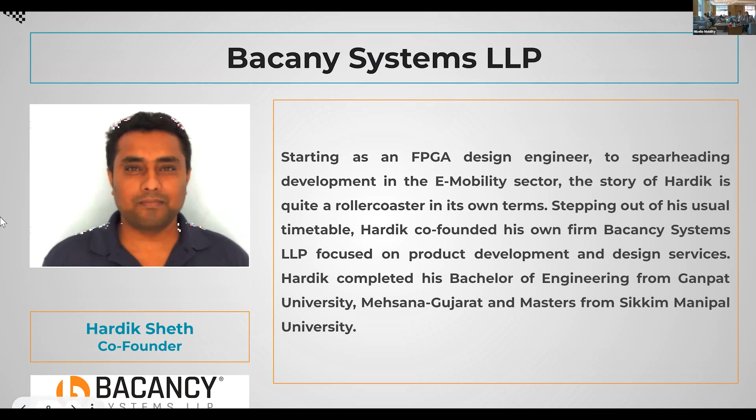So firstly, what we are doing at Igren Energi - I've been at Igren Energi for the last 6.5 to 7 years. When we started here, we had an IP and we started with a solar product. We took a pivot and went into BMS because our IP was mostly directed and was going to be used in BMS kind of application. I have been involved here, working with the product development team, so I know the product inside out. And right now I have migrated and started working into all the customer engagements happening here.

Like I said, I'm an electrical pass-out, and I've previously worked with big power system applications, big power plants and everything. But in the power electronics field, I believe there is a lot of scope, and with BMS and customers knowing what a BMS is, that's the best thing that has happened in recent times. People right now, like what Sahil and Chaitanya have said, are coming to us and asking relevant, directed questions, and right now the customers know exactly what they want - that's a very important thing we are seeing right now. So we'll take this discussion forward with all the questions that we'll have.

Okay, maybe we can allow the screen sharing. I'll mute myself. Okay. No, it's mute, it's mute. Go ahead.

Hello all, I'm Kamlesh, and I work as a business development manager for CFD and thermal solutions for Altair, covering India and Gulf. Thanks for the opportunity, and a very good afternoon to all of you. I'll be covering a bit on electrification and different solution offerings from Altair, and most probably the entire solution for BMS.

I normally start with the agenda to give a heads up of what I'm going to talk about. The first topic is almost covered over the last hour, so I'll skip most of it. Then the operation and advantages of BMS, then some causes of battery fire - some of the incidents in the news - and how Altair plays an important role in BMS and thermal management, and of course recommendations for BMS. So it will be mostly repetitive of what the panelists have spoken, but the solution we offer would be slightly different.

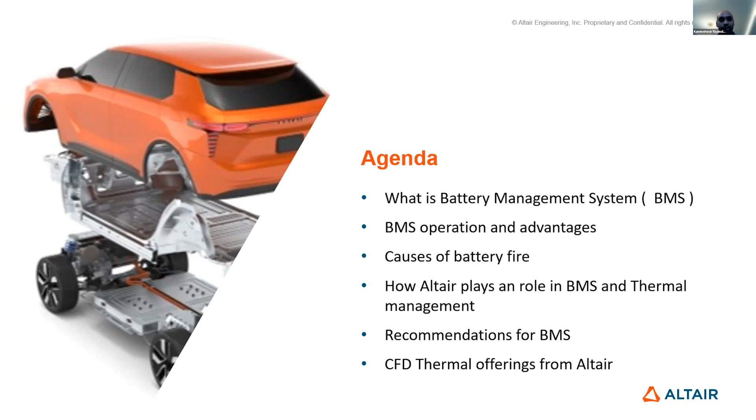Okay, so I'll carry on with what is BMS - I think everyone in the meeting is aware of it. I would just like to say it's a system control unit modeled to confirm the operational safety of the battery pack system and maximize performance. But there's more to it - complete monitoring, complete protection, complete charging, discharging, communication between different electronic controls, complete diagnosis of the battery including SOC, SOH, etc., and complete data management, which is necessary for performance efficiency of the vehicle.

Everything comes from BMS. There was a discussion earlier about how we should be able to monitor, and most importantly, how we would be able to validate it as well. So that's the solution Altair gives.

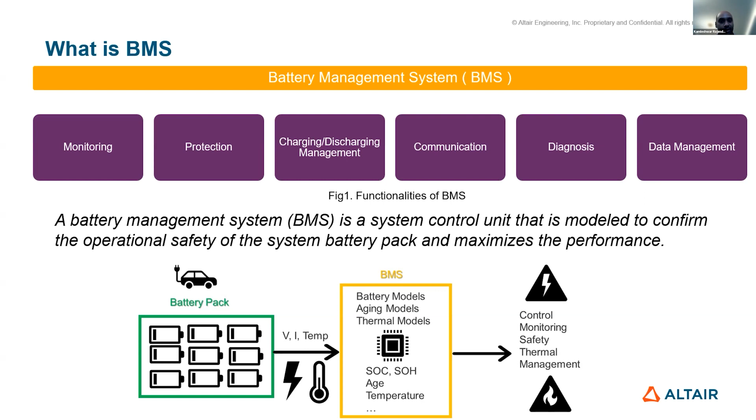So normally the operation inside a vehicle comes from the BMS, from the accelerator, from the electronic control unit. Then it diagnoses the battery performance, goes to the power converter from the motor, and then it senses the complete communication on board.

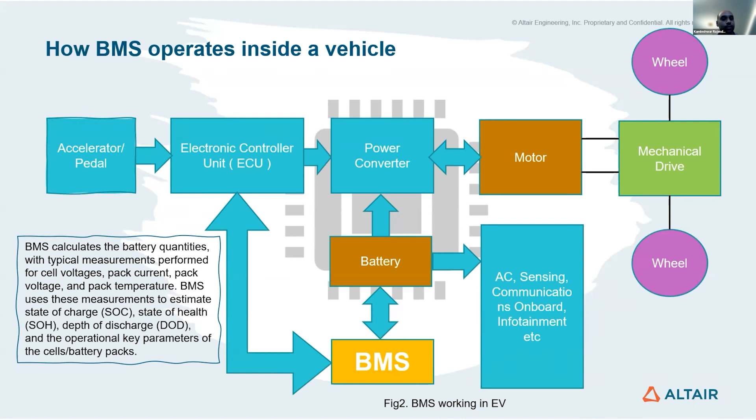From Altair's point of view, the solution offerings are divided into technical, operational, and economical aspects, because everything ends in a business. The technical point covers preventing damage from over/under voltage, cell balancing, and limiting charge current. Operationally, the most important thing is minimizing thermal runaway and ensuring safety and reliability. Economically, it's of course about low cost.

So people, electric vehicle manufacturers, safety and the economical aspects required to ensure safety often go hand in hand. So these three important steps are required to entirely maintain the battery management system.

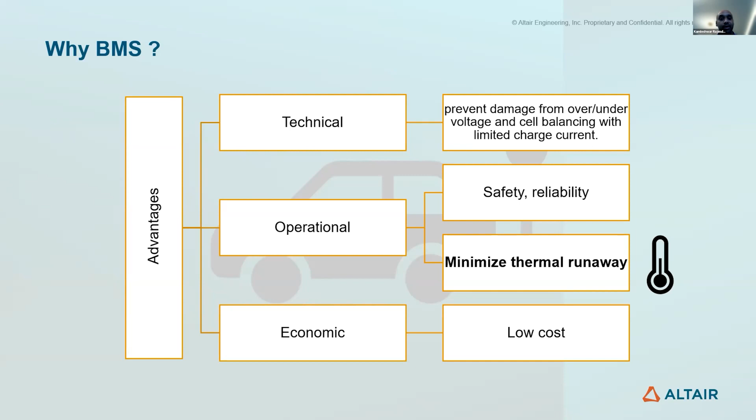I will mostly speak about the causes already discussed in the panel discussion, but I'll run through some important points. Faulty electrical and mechanical design—this is a debatable statement, but design validation and tuning is particularly necessary for the BMS, meaning how much load it can manage, how it will monitor, how it will diagnose, etc.

Then of course there's production quality. I do understand that manufacturing these systems is very niche, and it requires a lot of technology and precision to manufacture these kinds of things.

And of course battery monitoring—I'm going to speak a lot about it in the coming slides. Complete discharging and overcharging, what's the defect, we would be able to cover that.

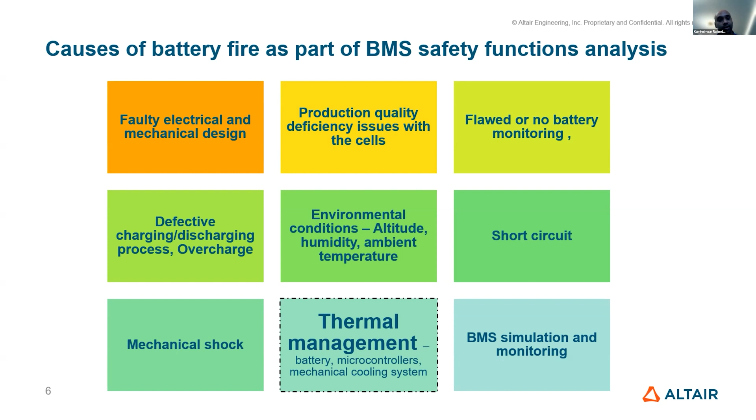Environmental conditions with higher temperature, high summer picking up—people don't realize, technologically, people don't realize as well. Most of them think it's due to high summer that the battery is not able to perform, but it's not just that. Environmental conditions, short circuit, mechanical shocks, and most importantly thermal management play an important role.

So that was just a quick cover. Now, how Altair plays a role in the battery management system, basically to optimize the performance and enhance safety.

Electrification solutions—Altair is basically a software and engineering solutions and consulting company. We have a lot of solution offerings in different fields, starting from structural, electromagnetic, CFD, thermal, and we also have a consulting division.

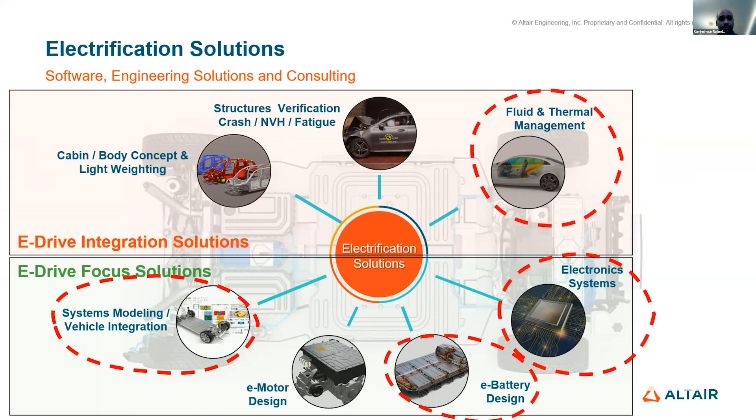We started as a pre-processing company with Hypermesh as our flagship product, particularly for structural, crash, and NVH fatigue. Then we eventually ventured into fluid and thermal management, system modeling, e-motor design, e-battery design, and electronic systems. I'll mostly cover system modeling, fluid and thermal management, a single slide on electronic systems, and battery design.

For e-motor design, we have a solution offering from an electromagnetic software called Flux, which is a low frequency electromagnetic tool used to design the e-motor. It can also do vibroacoustic analysis, and we offer a complete multi-physics platform for it.

Battery design is a huge responsibility. I understand, and being part of Altair, I'll take the liberty to say that nobody is perfect yet. Everyone is on the learning mode, the research mode, the testing mode. We are just contributing a bit of what we can do on battery design.

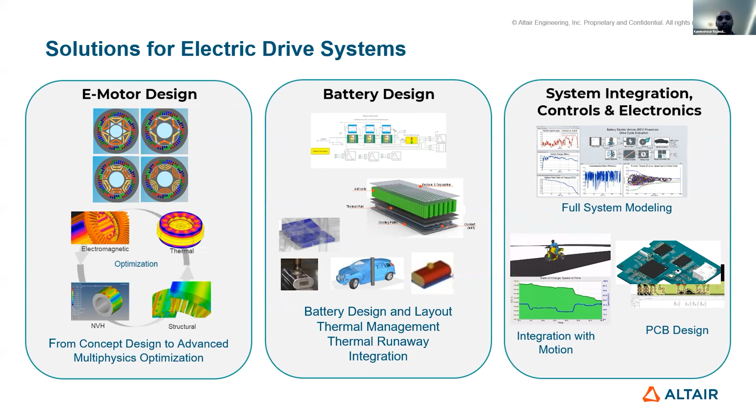System controls, integration and electronics are major contributors to BMS, for predicting state of health and state of charge. Complete full system modeling is available for this.

There were a lot of challenges discussed between design and how the system functions. We exactly fall in between—once you design it, we also help in designing, but how do you validate it? There was a question about how to validate it even before it gets into prototyping.

Say you have a design and you want to fine tune your product—this is the solution Altair gives with respect to battery design and the BMS system. If you see this entirely, we can do a system level simulation or a single product level simulation as well.

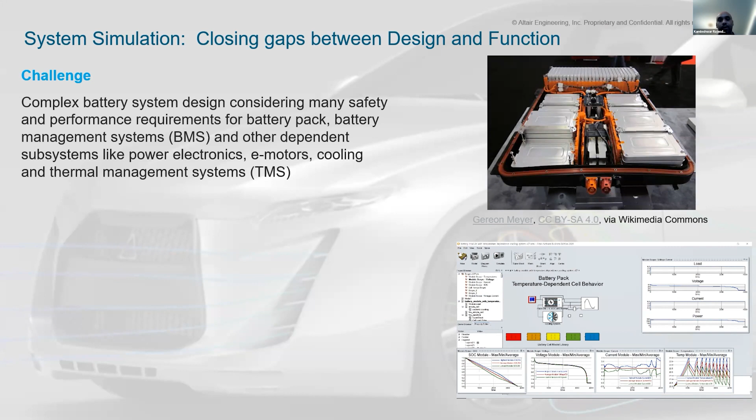The complete cooling cycle, complete state of discharge, voltage coming in, state of charge, current module, and maximum temperature attained—everything can be covered using a particular software. I'm going to talk about it and show some pictures; it's public as well. The solution we offer for that is Activate, for battery pack system behavior, which includes multi-physics.

It has hybrid system signals, complete physical libraries, Modelica, HyperSpice. Then we have Compose, where you can put in some scripts for cell model parameters, and you can go on with the complete behavior of the cell.

Then the hardware, so functional mockup units. If you want to write a code for your BMS as well, and how it's going to function, how to fine tune it, how to validate it, we offer that solution as well.

Then most importantly, we help you in the design decisions even before it gets into prototyping, and optimize the performance and verify the critical safety requirements, which is particularly required for BMS.

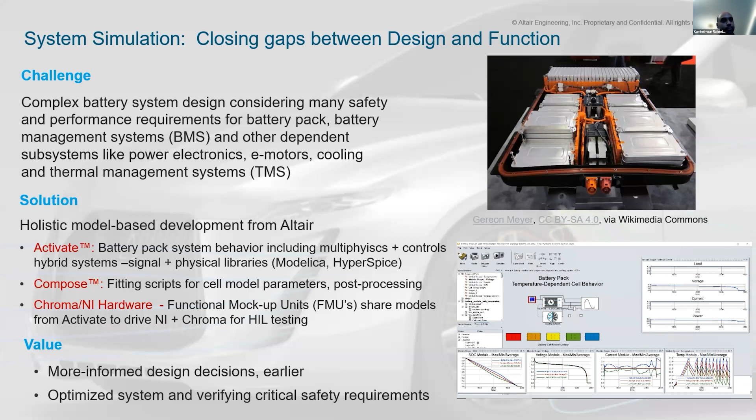Now this is a public example which we are working with an EV startup, and this is available on the Altair website, so I just took out a picture. There is a charger and load, you can see a lot of cylindrical cells attached to the BMS, there's a lot of connectors, and what we have is an Altair Embed GUI.

This is the solution we offer. We verify and fine tune the complete BMS solution for different sets of series or parallel battery loads which are required.

What is the state of charge? What is the voltage it can manage? What is over-fluctuating? Whether the cell performance is going for a toss, complete voltage, complete charger, everything we would be able to analyze and set, and it will also help you design the BMS according to your battery specification, and vice versa as well.

So you might have designed a complete battery with respect to the series loading or the parallel loading, with the serial link between your BMS. So we offer software which can particularly link with your testing parameters and help you recalibrate or revalidate your BMS with respect to your battery pack.

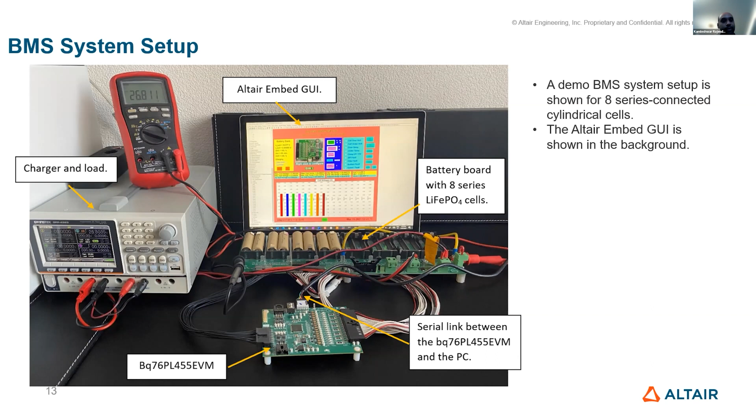Okay, so that's Embed, and most importantly, what is the custom solution you want to get developed? It can be an integrated development in order to perform a complete set of tasks to achieve a final design.

It can be anything - cell temperature as a variable, how the cell is behaving, what is the state of health, what is the state of charge, what is the number of cells, whether some cells are shooting up, some reactions are happening, what is the voltage, what is the voltage fluctuation - different sets of measurements.

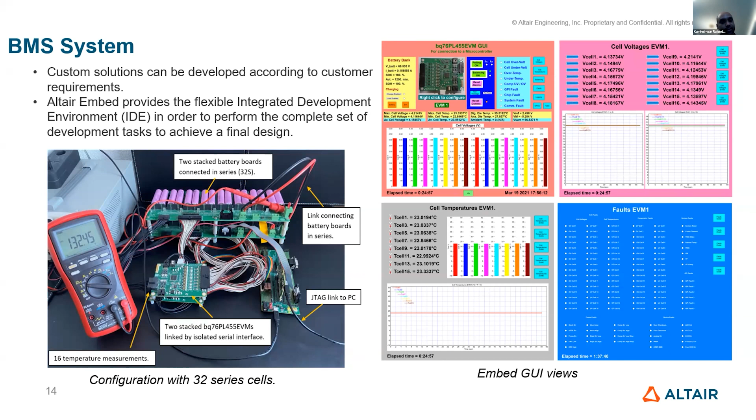If there are any hotspots coming in, we would be able to analyze that and identify the fault if it's there, and integrate this BMS with our software solutions what we offer.

Of course, the most important stuff - charging and discharging. So take any battery pack with a particular BMS which is designed to calibrate it. The complete controller which is developed in Embed with respect to the software coding, and it's vice versa as well, and you can integrate with the different battery pack design as well. You would be able to completely control it, and we help in validating the controller and as well as the complete charger and loader.

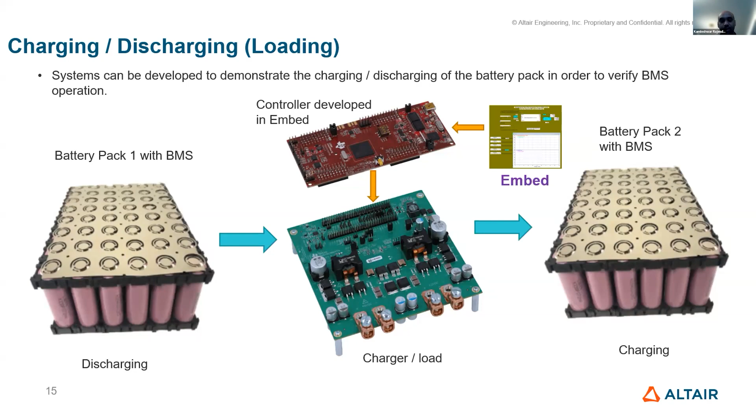So battery thermal management, this is my favorite topic. I come from a CFD thermal background. Of course, addressing key challenges, BMS does play an important role.

So analyzing the performance, what is the temperature, any hotspot, how does the performance compare to different iterations, how long it is going to take, then what is the performance of a product, whether it meets your specified targets, it meets your efficiency - so how does CFD help you in that.

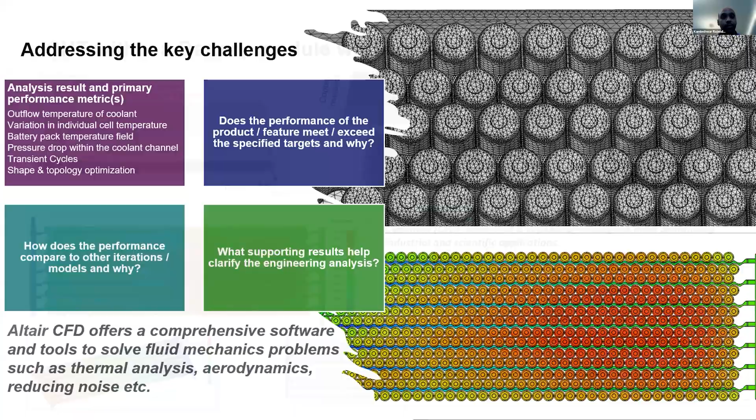So we do have a complete battery module within our software solutions, and it is a general purpose code, but of course we have developed certain niche charging and discharging cycles for the battery - this is a public model which is around 560 lithium ion cells.

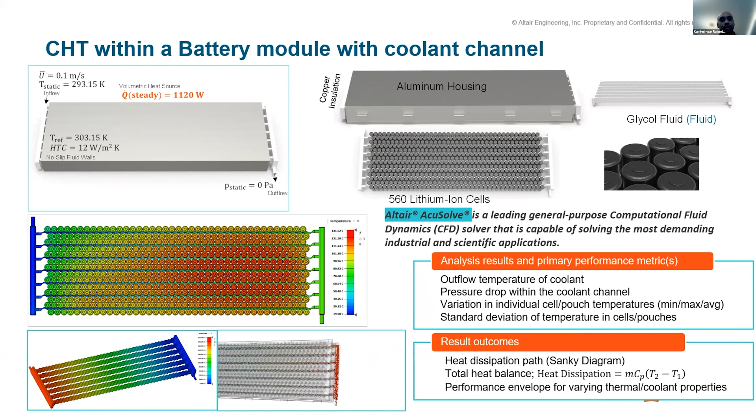Different outflow temperature, pressure drop variations - you can verify where the hotspot is, complete heat dissipation, total heat balance performing, and for complete active cooling, predict how much, how the temperature of the battery pack is, whether the coolant is taking away the heat, ensuring that your battery pack is at a proper temperature.

Then complete charging and discharging cycle of a battery with respect to your initial state of charge, then with the current being supplied to it, what are the thermal loads, what are the ambient conditions. Humidity also plays an important role - if it's say in Chennai it's humid, Mumbai it's humid, so you would be able to put in humidity as a factor as well.

Not much, but of course humidity is a factor, and you would be able to do ambient temperature modeling. You can also input solar radiation as a factor and analyze the exact battery performance, with respect to a battery pack or a particular BMS.

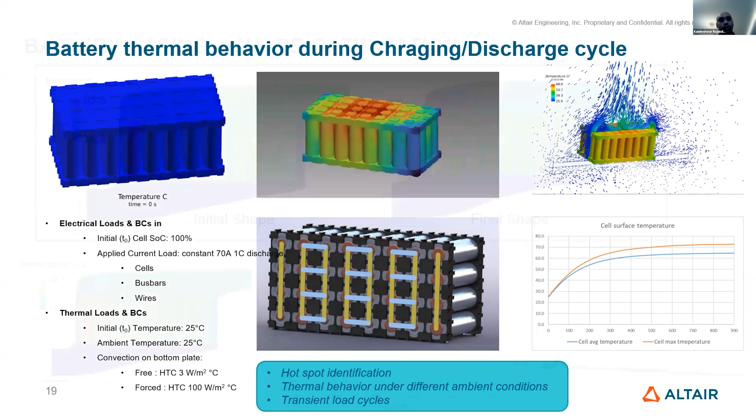I'm also going to show you an example of certain battery casing optimization, and I'll also show an example of a complete vehicle EV development with a public example from two of the prominent EV startups in Bangalore.

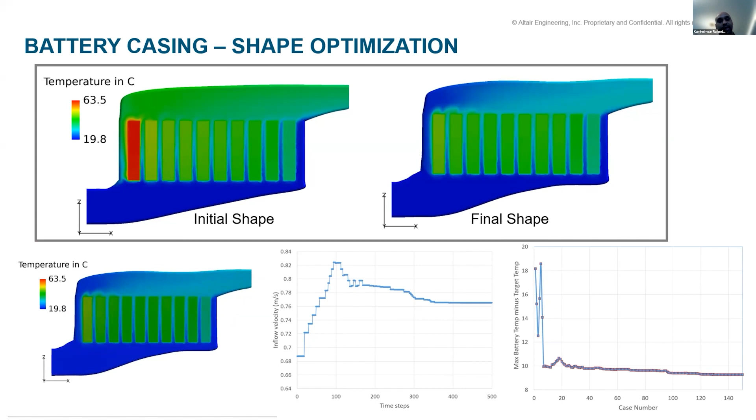For battery casing optimization, if you want to optimize your battery pack design with temperature as a variable, you can design accordingly to ensure the temperature of your cells is lower, the cooling is much faster, and there is no recirculation of air, ensuring the air is taking away the heat. So we would be able to help you in that.

We also offer electronic thermal management. We have an ElectroFlo solution particularly designed for electronic PCBs, system level thermal analysis as well, giving voltage as an input. So there are different solutions.

I don't want to confuse people with particular names, but these are just Altair solutions for different applications. We would be able to help you with a complete PCB thermal environment, identify the copper layers or vias, and change electronic design. So we can help you in complete electronic thermal management as well.

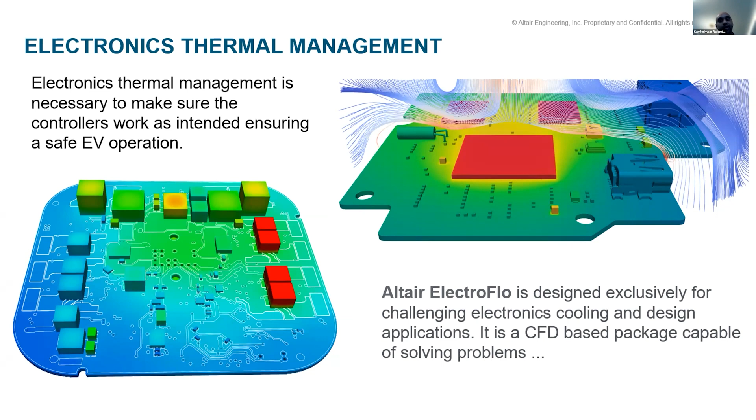Some of the recommendations for BMS, according to me and some of my colleagues, we have put together. Of course, you guys are the experts on it, but just to put my views on it.

So it can be anything - structural, different types of parameters, the positive temperature coefficient sensor, then the motor driving as well which passes on the supply, and how much load the BMS can manage, the complete integration with the safety vents, the shutdown separators.

If these go for a toss, say the temperature of the battery is increasing and it's not working out, it is going to increase the temperature at some point, and it's going to lead to an incident. So complete mechanical system design, thermal, cool design, microcontroller heating - it's not limited, these are just my points. I think it was mostly discussed in the panel.

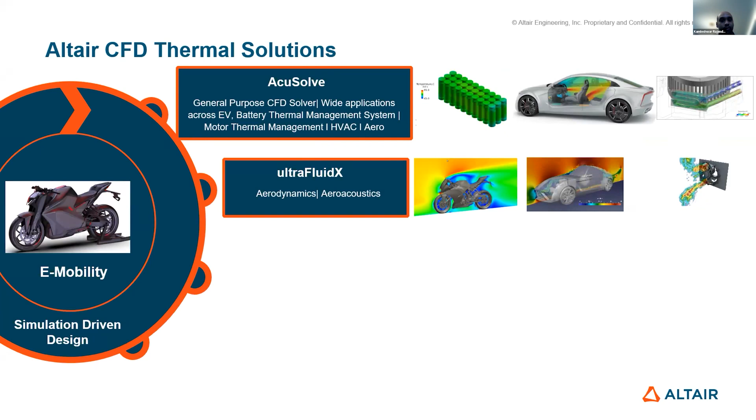I've also taken the liberty to show some of the Altair CFD thermal solutions for electrification. AcuSolve is a general purpose code particularly for battery thermal management, which I've already shown. Then ultraFluidX for complete aerodynamics and aeroacoustics, fan noise as well - it is a lattice Boltzmann code. nanoFluidX for EV gearbox oiling - it's a meshless CFD software.

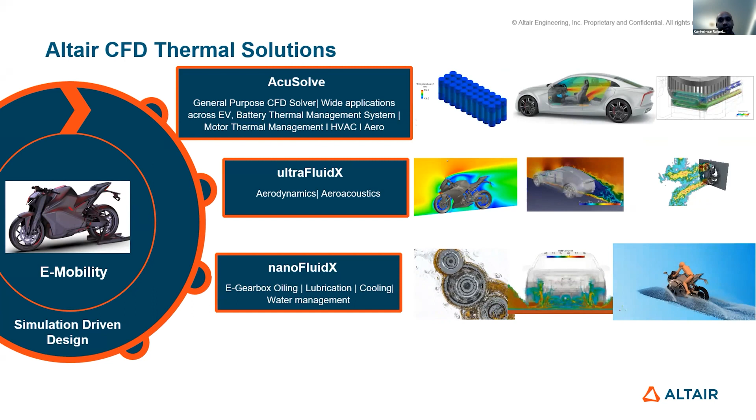Complete water wading, then ElectroFlo for electronic thermal management. These are some of the case studies which I was talking about.

One is Ultraviolette, and I'm thankful to them, Ultraviolette and Simple Energy. We had a virtual conference where they presented - this is a snap of it. The complete video recording from Ultraviolette and Simple Energy on how they utilized Altair CFD solutions is available on the Altair website. Ultraviolette completely uses Altair CFD for aerodynamics and battery pack cooling, and Simple Energy has gone through

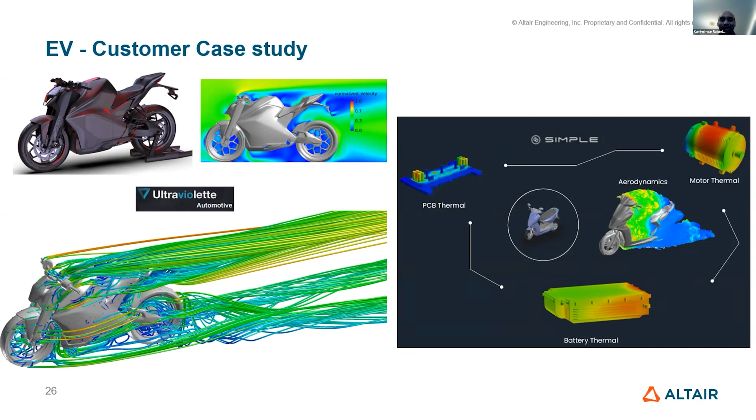the complete product development cycle of their electric two-wheeler, including PCB thermal, motor thermal, aerodynamics, and battery thermal. Actually, BMS as well has been customized completely using Altair CFD solutions.

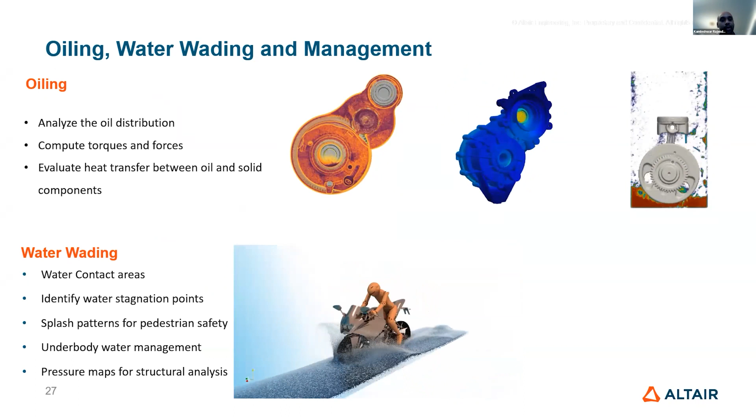Then these are some of the EV gearbox oiling and water wading cases for an electric motorbike as well, because this is one of the most important tests an electric two-wheeler or four-wheeler goes through. Some Nexon EV vehicles were recalled because of water clogging issues, so they are performing water wading simulations to identify the water clogging areas on the EV, whether the electronic components or battery are affected or not.

So this is my last slide. Altair completely provides solutions on battery thermal, BMS, motor multiphysics, aero, underhood, water wading, headlamp, humidity compensation, and electronic thermal management. Thank you, and any questions, I'm open to it.

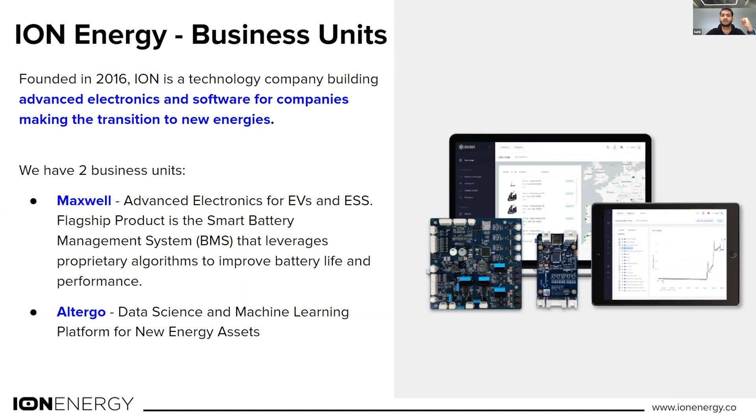So starting with, why BMS and software? So ION as a company, and Hiten knows this personally, we started off with trying to become a battery pack maker. We built India's first portable swappable battery pack. And then, we soon realized that the core differentiation between two battery companies will not come unless they differentiate on the BMS and software, because the cells come from the same suppliers.

And then the pack assembly is mostly operational and manufacturing heavy. So we identified where exactly the core differentiation would come from, and BMS being the brain of the battery, and software, of course, being on the cloud, and having the computational power of the cloud along with the resources you could optimize the battery pack using BMS and software. So that's how our focus shifted to BMS and software, and that's what we continue to do, along with some other advanced electronics that are currently underway, including the telematics control unit.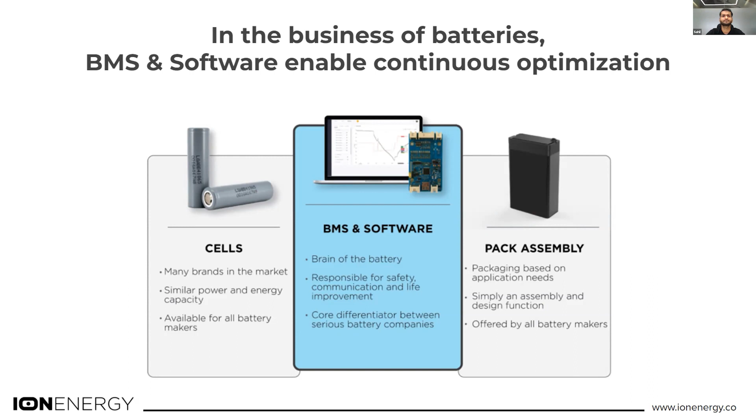What we are seeing is market moving towards something slightly more complex, wherein you have BMSs with data logging capabilities. You have a microcontroller, you have CAN-based communication that allows you to not only log the data from the battery, but also send that data either wired or wirelessly in order to visualize it on a platform in order to do diagnostics and troubleshooting. What we're also seeing is, some use cases in which we are using intelligent experience of the BMS, wherein the BMS is capable of two-way communication.

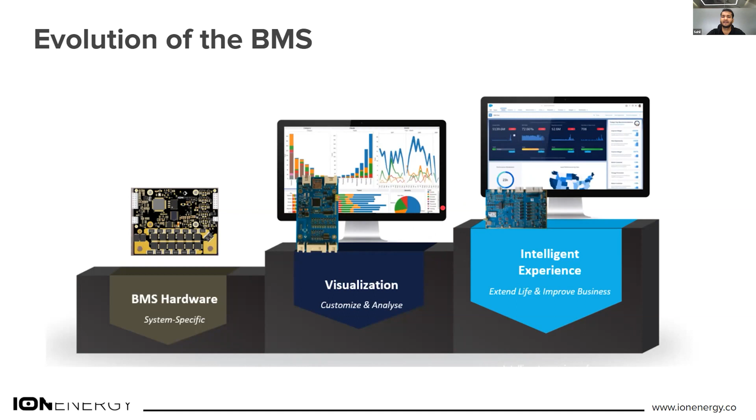So you have all the data extraction and sending of data to the cloud or to a wired platform, and then understanding that data in order to send over-the-air updates or firmware over-the-air updates in order to improve the life and performance of the battery. So ION essentially plays in this segment, visualization as well as the intelligent experience. I'll just touch upon what the intelligent experience is that we are offering, and then move on to why we believe that intelligent experience is not what the market may necessarily need at this point in time.

But before we jump to that, this is a quick overview of the product portfolio that we have. So you see 3 products over here. There are multiple variants within these products itself. Today, we have BMSs that cover the entire voltage spectrum, starting right from 24 volts, going all the way up to 1080 volts. So FSCT is the low voltage BMS, as you can see, for bicycle micromobility application.

FSLT is one of our highest selling products that's primarily used in 2 and 3 wheelers. What we have done is taken a platform approach and built the BMS to be extremely versatile, which means there is high configurability on these BMSs, and you can tweak a lot of these parameters to make them relevant for the application or use case you want.

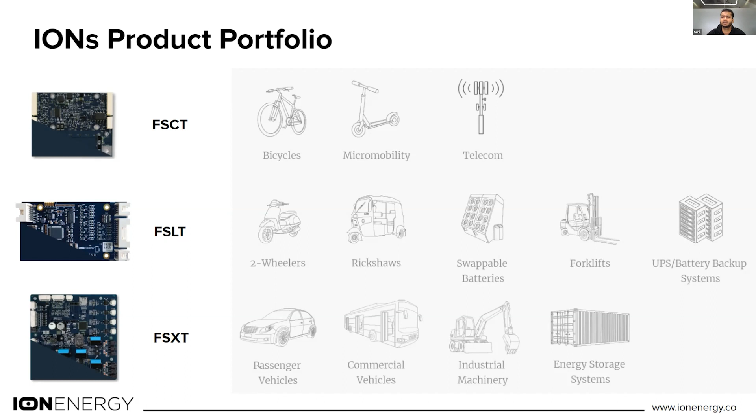Both these BMSs are... FSCT is a monolithic board which has MOSFETs on the board itself. FSLT basically works with power distribution units, or the MOSFET based SSR, up to 95 amperes. Then we have the FSXT, which is our high voltage BMS relevant for commercial vehicles and energy storage systems. You can get the data sheets on the website. I'm not going into too much technical information, this is just an overview of the applications these BMSs can cater to.

Talking about the intelligent BMS, the BMSs that we have designed today are intelligent. They have the capability to not only collect and send data, but also to receive data. So any config updates you would want to do, we leverage the smartphone or desktop software that we have to send config updates to the BMS. So the intelligent BMS is configurable, including the CAN IDs that you can tweak. We offer a lot of configuration parameters, almost about 250, 300 parameters that are there.

And I think Lithium Balance offers a similar experience as well. The idea is to make sure the user is able to tweak it based on the cells they use, the chemistry they're using, and the application they want to use it in. So on the right side, you see some of these config parameters, and within each of these branches, you see many more parameters that exist.

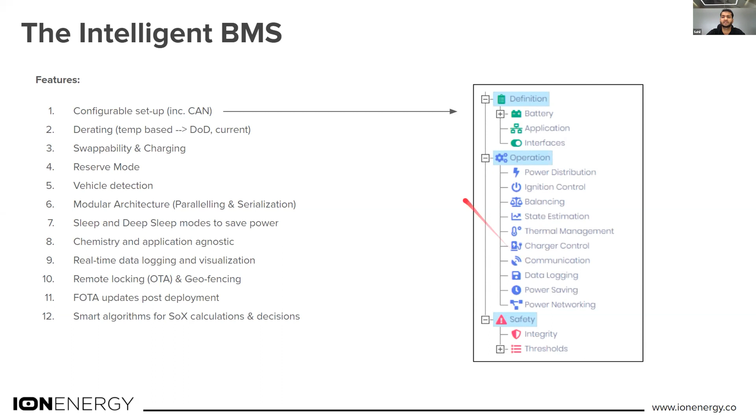From a swappability and charging standpoint, the expectation from an intelligent BMS is to basically manage portability and swappability. You have batteries that are currently getting connected in parallel. It's a very tricky use case, because if the SOCs are different and the batteries get connected to the network, there's a high paralleling current that can flow between them. So it's important that you make sure swappability is there, and when these batteries go inside the vehicles, the paralleling operates seamlessly.

From a swappability standpoint as well, a lot of customers are moving towards this. It's important that you don't just connect it with any charger. You basically have the right handshaking protocols and security protocols to make sure the batteries are not getting misused. So swappability and charging is a key feature that we offer.

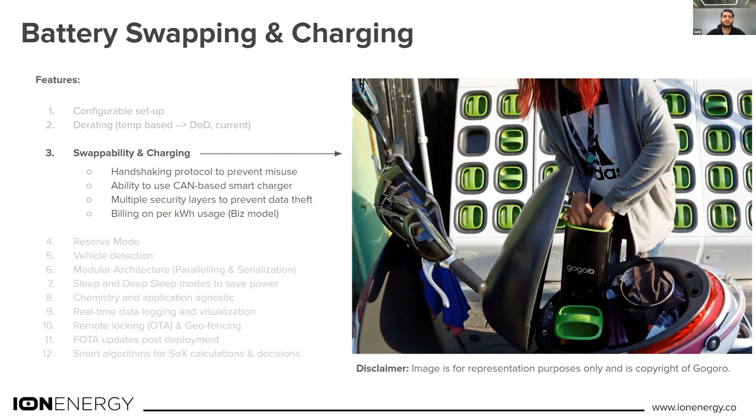I already touched upon paralleling, because when you're putting two batteries in a vehicle, the intent is to parallel them in order to increase the overall range of the battery. We implement interesting features such as auto addressing that allows us to eliminate the use of an external controller or hardware to do paralleling. So the BMS itself is designed to support paralleling without reliance on any external hardware. That's one of the core IPs that we have built inside our BMS.

Which is what we're not seeing a lot of companies do. They typically rely on external hardware, which overall adds to the cost and complexity when it comes to connecting batteries in a network.

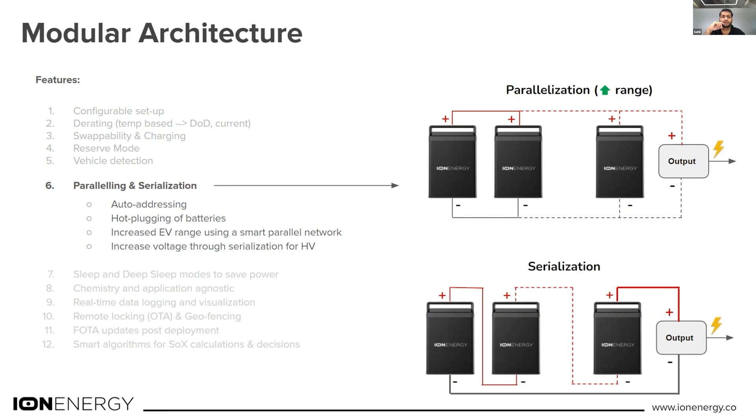This is what we're seeing as a use case for most fleet operators, wherein they're trying to leverage IoT. They want to do real-time data logging and visualization to understand how their assets are performing. Most of them want to do geo-fencing to limit the vehicle to a specific location or geography, and remotely lock it in case a user is misusing it or taking it out of that territory. They also want to do FOTA updates based on battery degradation and performance, because typically when using it for a fleet, you see battery degradation happen much faster considering the way it's getting used. So you would want to recalibrate the parameters of the BMS to ensure that the life and performance of the battery does not degrade significantly.

Over time, we've been deploying those solutions in the market, and what we identified is that the market currently is at a point wherein you have these PCMs that don't have data logging. Some of them have CAN, most of them don't have CAN. There is limited configurability or no configurability. Even if there is configurability, the values are hard-coded in the BMS. The SOX algorithms are highly inaccurate, you see them fluctuating between 60, 70, 80, 90 randomly.

We've seen that the market has currently been using PCM traditionally. There are also a lot of companies offering a very good BMS experience, but this experience comes at a cost and performance trade-off, since these are highly configurable BMS with a lot of parameters, taking a platform approach. There was a significant delta between what was getting offered in the market and what the market has been using, which is why we decided to address this gap by speaking with a lot of stakeholders to understand what exactly they need, because moving directly to an intelligent experience is not required for them at this point, and the cost does not justify the movement in that direction.

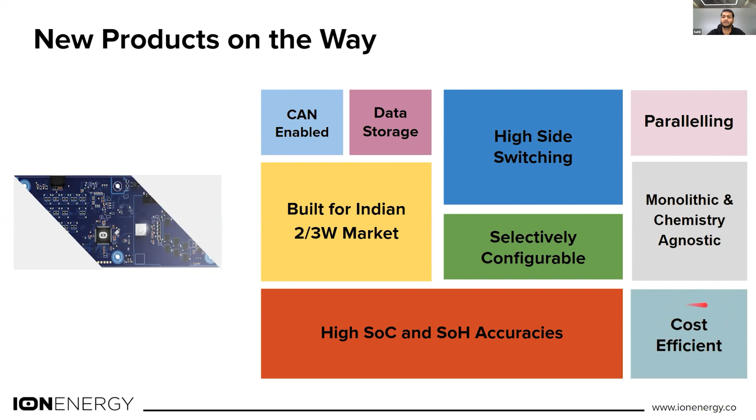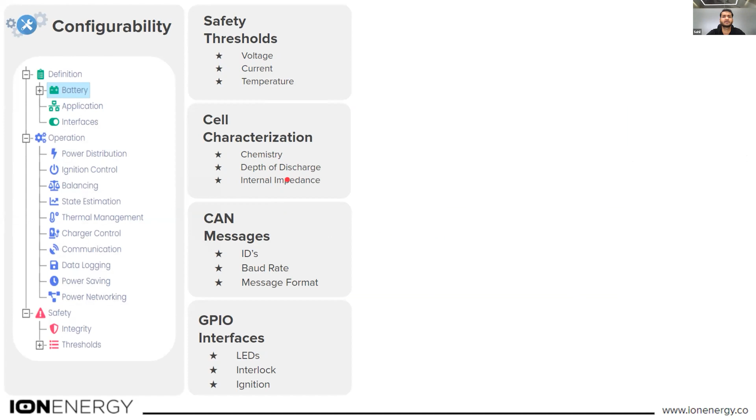And of course, the most important thing is the cost factor, which is highly important in the Indian context, and that's going to be the focus. Overall, a few of these things will remain intact from a configurability standpoint, so that we offer this experience to the OEM and they don't have to depend on us for every parameter change they want to do, while also offering some of these features that we see as a recurring requirement from most Indian customers.

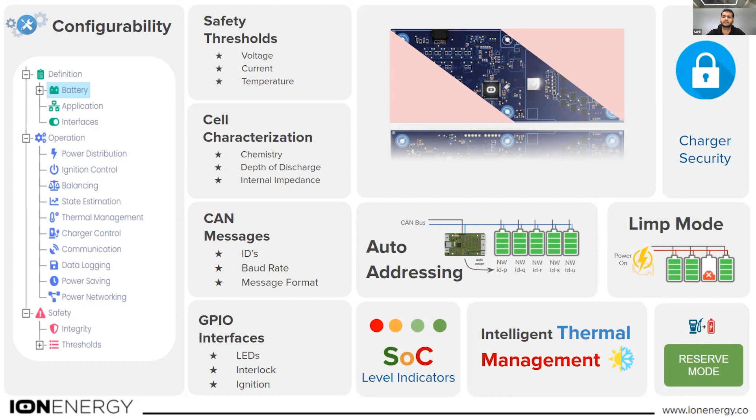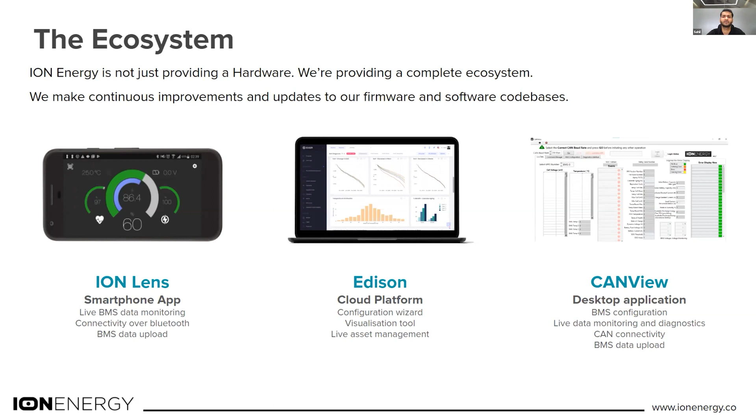Apart from that, when we talk about the BMS, we don't only look at the hardware. The entire experience we want to provide is that of the ecosystem. So we have been building our software platforms as well that enable customers to seamlessly configure, integrate, and use these BMSs, and also do diagnostics and troubleshooting during service and support stages. We have smartphone applications on both iOS and Android, our Edison Cloud platform hosted on the cloud, and a desktop application that connects to the BMS using CAN. So it forms an entire ecosystem that works seamlessly, well integrated with each other, to make sure the customer, for us the OEM or the battery pack maker, is able to use the BMS and configure it for seamless integration.

Apart from that, we also touched upon localization. It's quite important for us. We are headquartered in Mumbai, with 85 plus people today. The idea is to keep our offices localized, keep our production localized, in order to have control over the technology and production and cater to the majority of Indian customers. This is becoming more important with each passing day, and we understand the importance of this, which is why we've taken initiatives to keep this localized and ensure that supply chain dependency on other countries is limited.

So that's a very quick overview of where things stand. You can always visit the website that has a lot more information on the BMS and the technologies we're building, or you can always reach out to us as well.

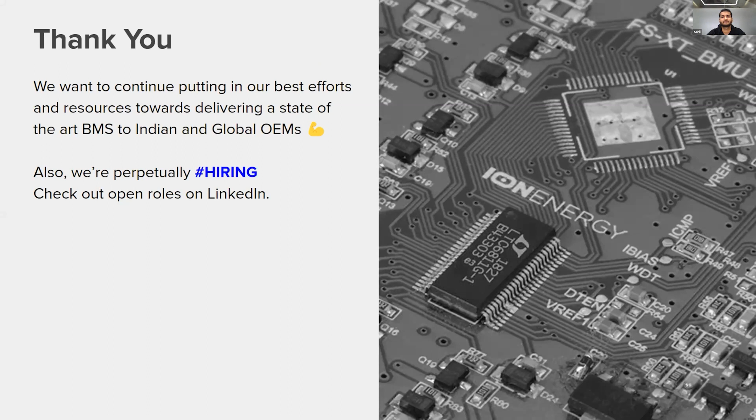Thanks, Sahil, for the presentation. I see a lot of progress since I last touched base with the ION Energy team. I'm very happy that there are multiple product lines which have come forward.

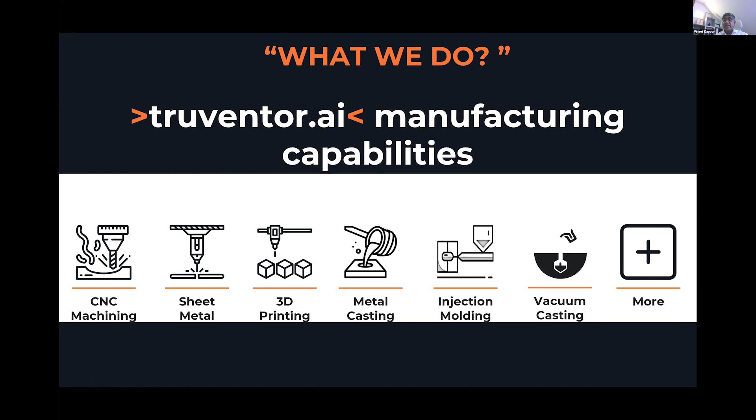We have access to multi-layered bus bars we have already made for our customers in India, and other solutions like connectors, with bending and laser technologies. So how do we do this?

As I said, it is utmost important, not only for a multinational organization but for a startup also, to have transparency at each step of the manufacturing process. So we divide that manufacturing process at an abstract level into pre-order, pre-production, production, post-production, and delivery phases. And on our platform, we provide possibilities as a customer for supplier discovery.

We have a free of cost 3D viewer where you don't need any license, CATIA or any other software viewer or even designer software. So we provide www.calculate.truventor.ai, where you can go and visualize, slice your models and make all the calculations you require.

So DFM feedback we give you, we have experts there to ensure this can be made properly. This is exactly what a startup is looking for: feedback, in fact a mentor and a coach as a guide who can give DFM feedback, design optimizations. We discuss with the buyers, purchasers in an organization, designers, R&D people, process optimizations, price calculations. In this phase, we provide all of this as a service.

Well, this is from my side in a very quick way of presenting. I could have gone into details of what we are doing right now. Anyhow, I cannot show you the figures of the patented products of our customers right now, like multiple level bus bars, and we have also developed complete battery boxes with sheet metal, deep drawn technologies and all that.

So I'm not able to show all this, but we can support you in our ecosystem where you can benefit from our suppliers and get the right product at the right time for your EV solution, in 2-wheeler, 3-wheeler, or even heavy vehicles like buses and trucks and all that.

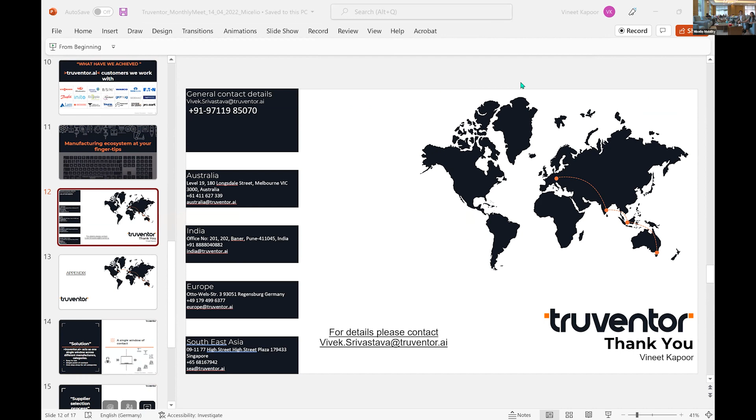Okay, great. So thanks, Vineet, for your presentation. I think Truventor is doing great work, and many technologies which you mentioned are difficult for EV companies to master - busbar, battery casing, cell holding, and even connector development and manufacturing are very complex, and usually we see a lot of failures in mating parts, or tolerances. I'm very sure Truventor can help our members in making components which are fit for application in very few iterations, rather than wasting time and money on multiple units or prototypes, through the DFM support which you already mentioned.